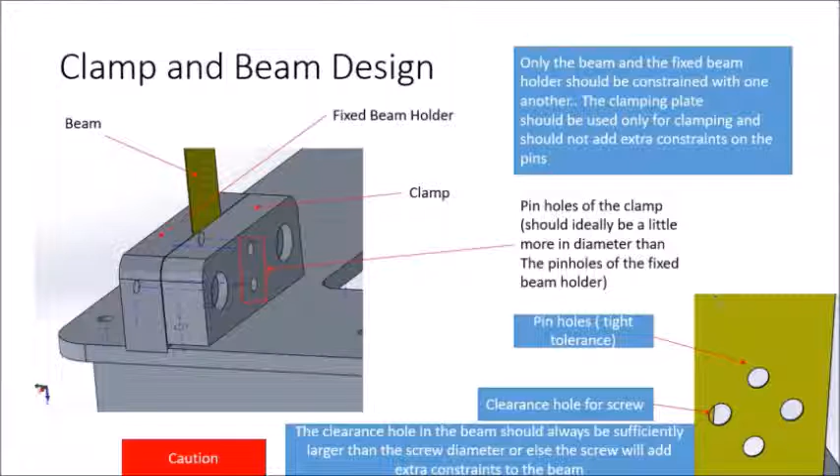In contrast, the screw holes on the beam have a larger clearance so that slight misalignments in threading holes do not cause any extra constraints in the beam. The pinholes in the clamping plate are also sufficiently large due to this reason. It is important to remember that the design you conceptualize has enough space for inserting or tightening of the screws. Care should be taken that the assembly and disassembly of the components is easy.

Here is a very important point. The tolerance that you select for location pins has a major bearing on the quality of the flexure mechanism. Interference fits and large clearance fits should be avoided at all costs. Generally, we use H7/h7 combination for the pinholes. Look at the general design process video to understand the process of determining the numerical tolerances from hole and shaft combinations.

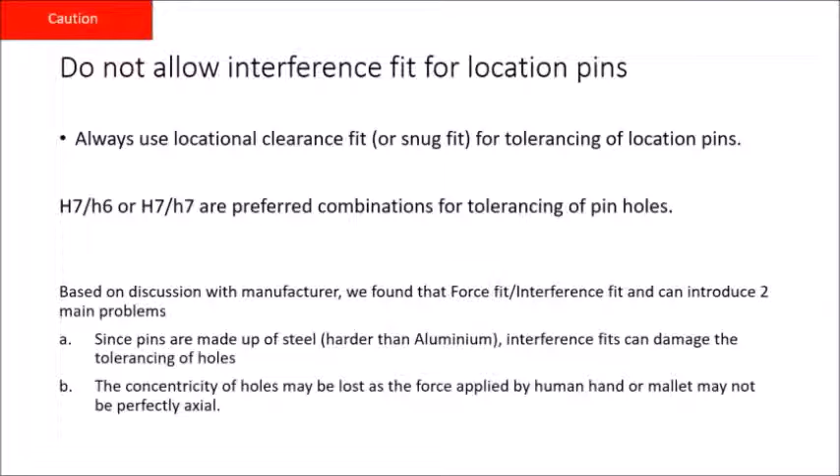Sometimes it is required to design holes into a part at different orientations. In such cases, it is a good idea to switch to the hidden line visible mode in SolidWorks and check if these holes are interfering with one another. Also, if you want to check whether the overall assembly of the components is proper, you can use the clearance verification and interference detection features in SolidWorks.

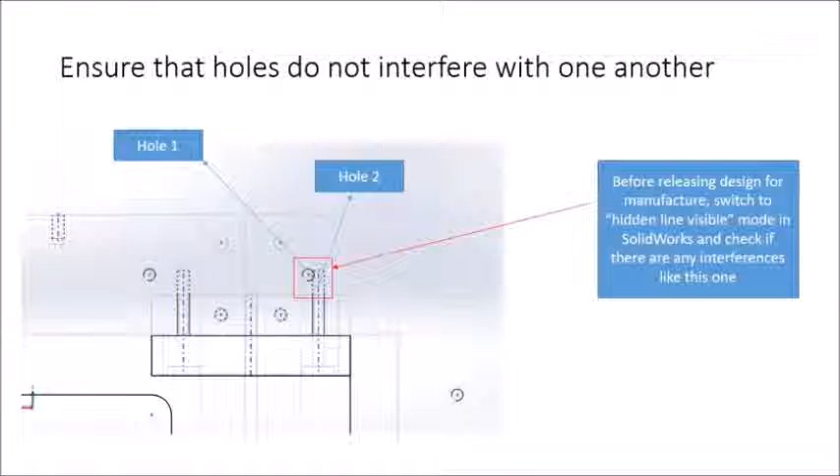Another important point to remember is to allow for sufficient material near the edges of the holes. As it can be seen in this figure, the stress flow lines get crowded near the edges of the holes, and to avoid such failure, sufficient material should be provided there. As a thumb rule, at least 2 mm offset should be provided from the edges in case of holes.

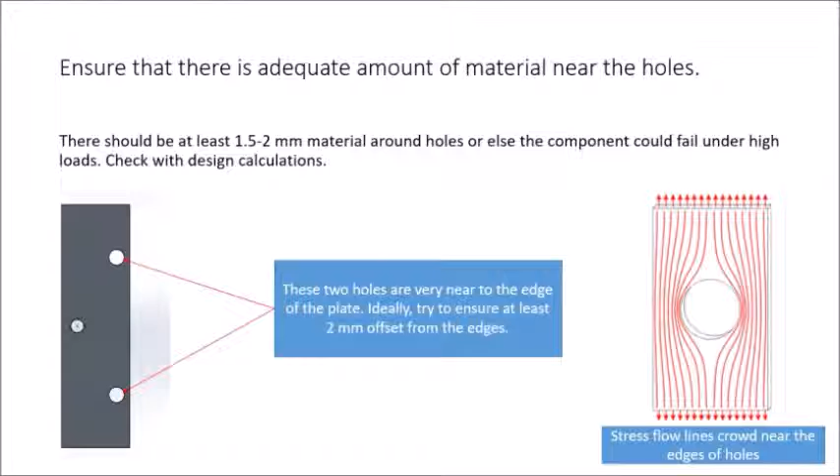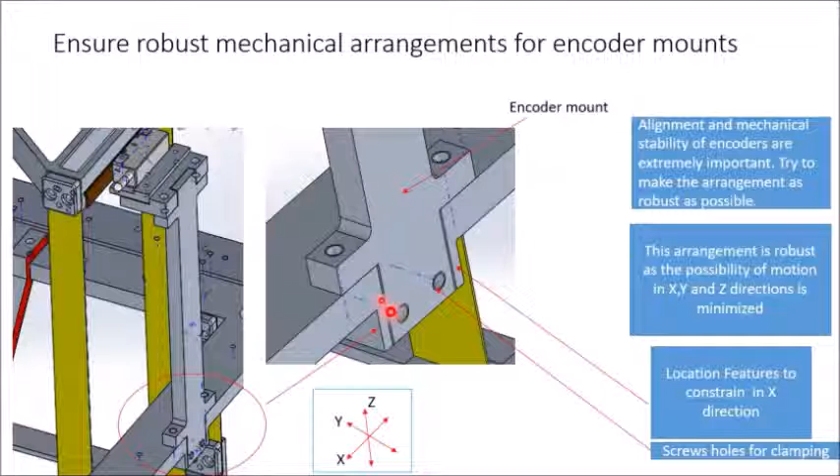Encoder mounts need to be designed so as to resist deformation in multiple directions. Location features are a good way to do this. Here it can be seen that the arrangement of the encoder prevents the motion of the encoder mount in X, Y, and Z directions. For a successful threaded joint, sufficient number of threads need to be engaged. As a thumb rule, at least 4 to 5 threads are needed for proper clamping.

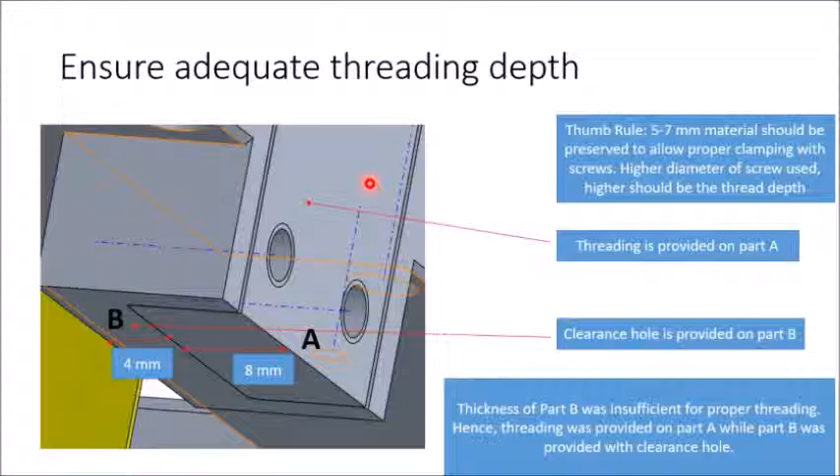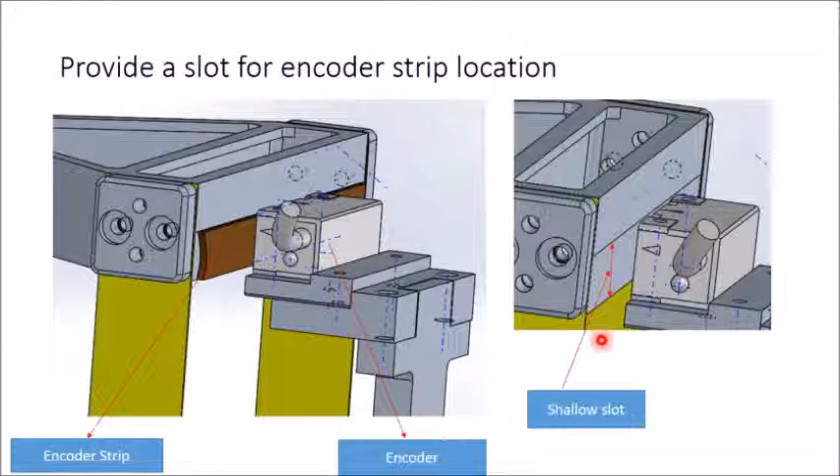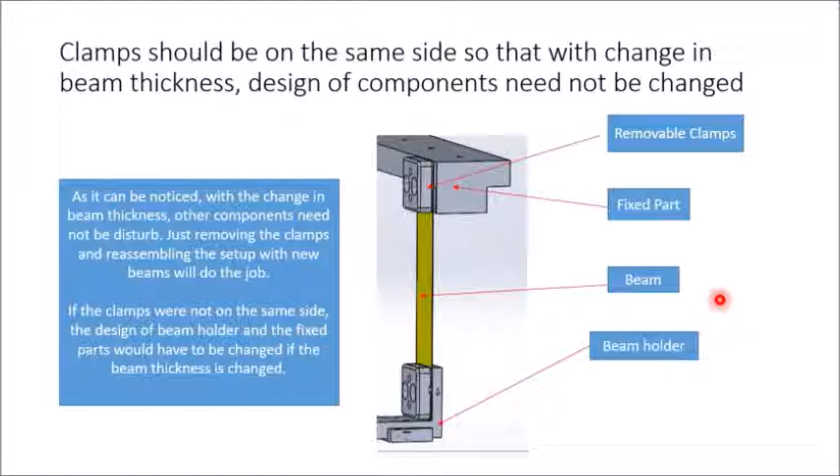This is an optional step. However, providing a slot for encoder strip location does ease the process of aligning the encoder considerably. Therefore, wherever possible, this should be included. This is a very important point. Very often we need to change the thicknesses of the beams in the setup. But if the clamps are on the same side, we will not need to change any part design to accommodate this change. So every time it is important to ensure that the clamps are on the same side of the beam.

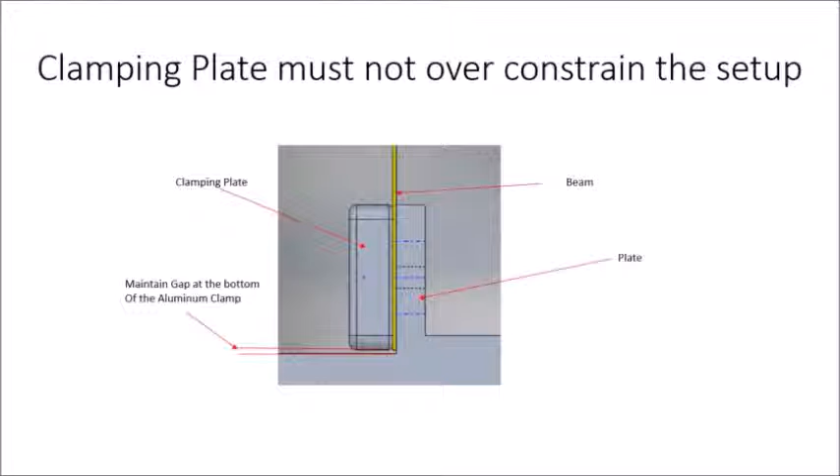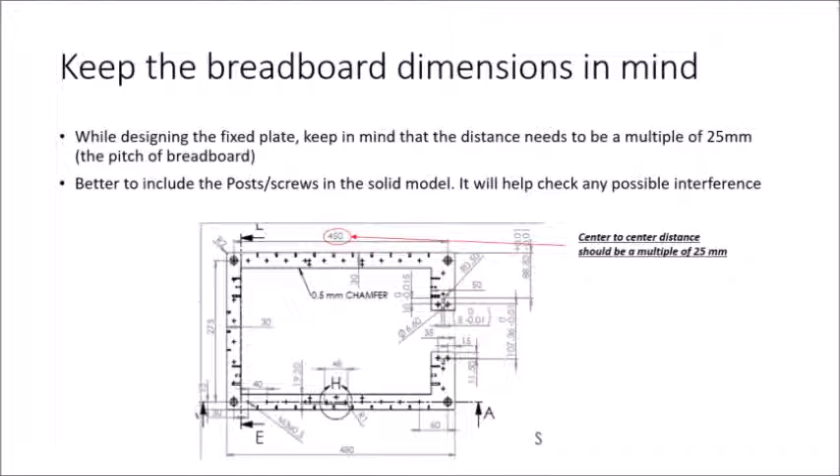While designing the setup, and especially when selecting the position of the posts or clamps which are to be fixed with the breadboard, keep the pitch of the breadboard in mind. The Holmarc breadboards have a pitch of 25 mm, and so if you plan to fix the setup on the breadboard, know that the distance between the posts should be a multiple of this pitch. A detailed consideration of this topic is included in another video. Please have a look at it.

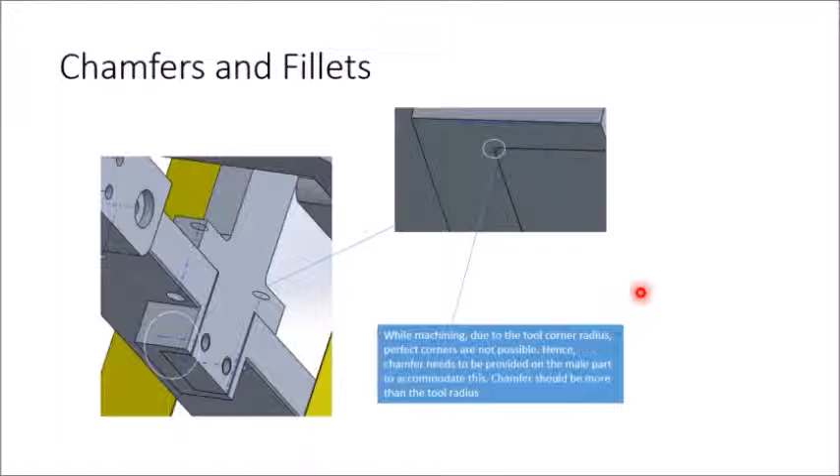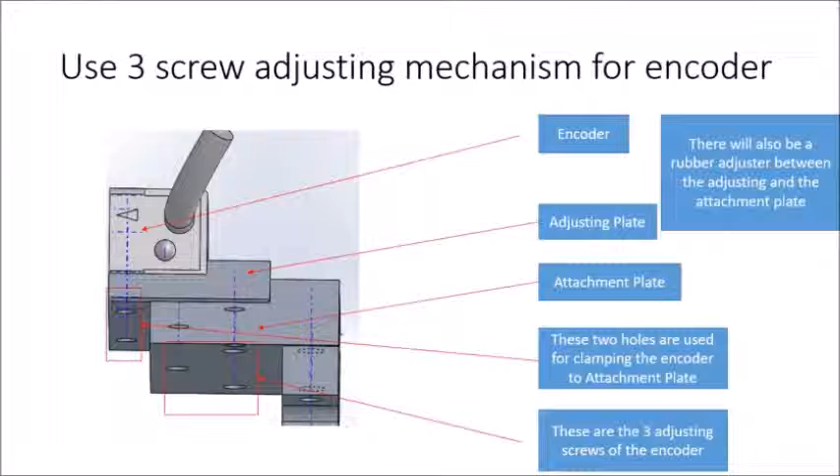Always provide chamfer or fillet on the sharp corners of the part that functions as an effective shaft. Milling operations generally leave round corners on the effective hole, equal to the milling tool radius. This can interfere with the sharp corners of the effective shaft and hence we need the chamfer or fillet on these edges. A detailed consideration of this topic is included in another video. Please have a look at it. The moral over here is to avoid sharp corners as much as possible so that we can avoid stress concentration.

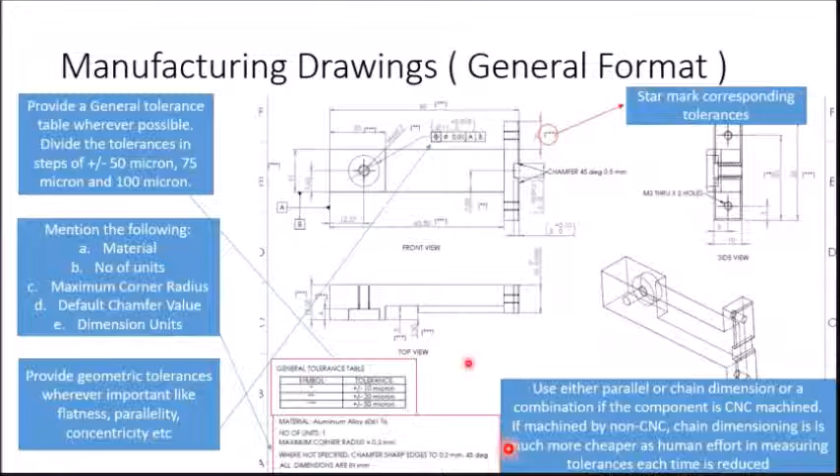Shown here is the general format for a manufacturing drawing. It is always a good habit to include a general tolerance table as it makes it easy for the manufacturer to quickly evaluate the cost of manufacturing. Geometric dimensions and tolerances should also be included in the drawing along with indications for material, number of units, the maximum corner radius, and the units of the dimensions. A detailed consideration of this topic is included in another video. Please have a look at it.

The most important thing to understand in this slide is that the machining cost of any component varies exponentially with tighter tolerances. So over-precise tolerances should be avoided at all costs. Making a tolerance table in the manufacturing drawing as discussed previously can help reduce cost as well.